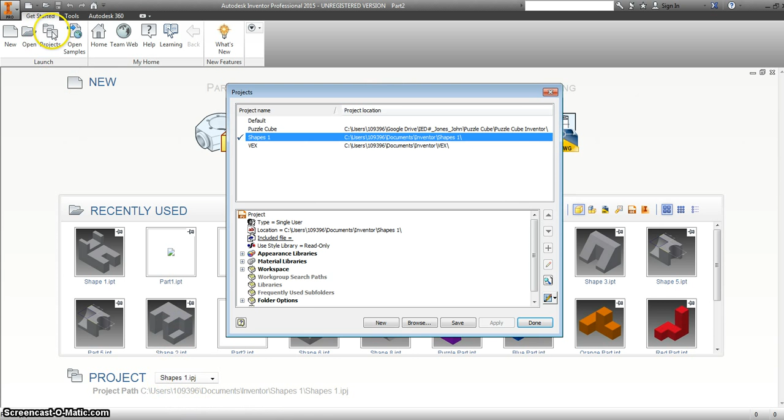Okay, if you do not have a shape project, remember, you're going to do Project, and then New. Next, you're going to name your project Shapes, and then you're going to change your path for your directory to go to your Google Drive, your folder, and then to the Shapes folder right here, and then you're going to hit OK. I can't do it because I've already done it, but you're going to hit OK and go on.

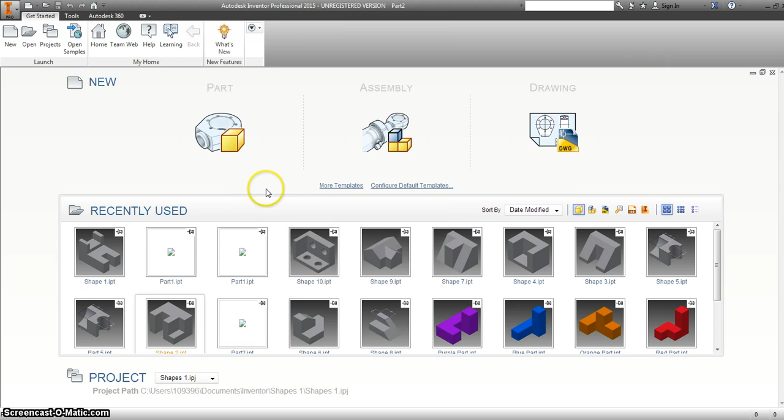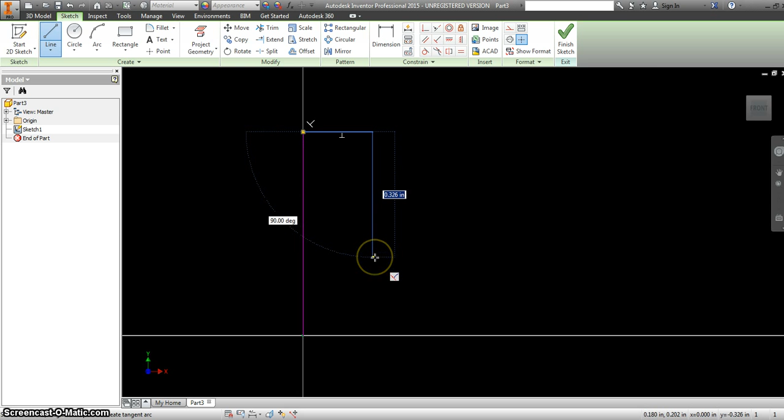So that means we're going to draw on our front plane. Okay, so to draw that L, we're going to use our line tool. We're going to start at the origin. I'm going to click, drag up. You see how it says that it's 90 degrees. Click and then drag across, keeping it perpendicular. Okay, this is still 90 degrees. Alright. Okay, so there I have my L shape.

I kind of drew mine a little weird, so I'm going to dimension it here. So from here, you're going to hit Dimension. And we know that the bottom of that shape, remember, you're going to click the line. You want your dimensioning to be as neat as possible, so you're going to pull it down, keeping that number in the center. And that is going to be 2.25. Okay, and then our height here, same thing, is going to be 1.5.

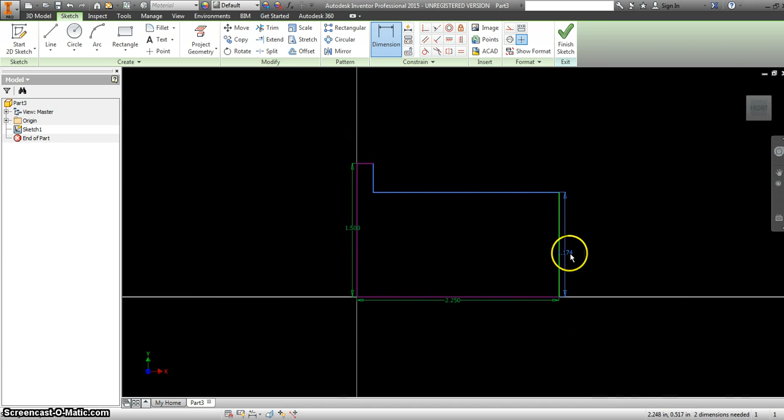Make it so I can see it. Alright, this height right here is going to be 0.75. And then this distance up here is going to be 0.75. Okay, so here is my L shape that's the front of that.

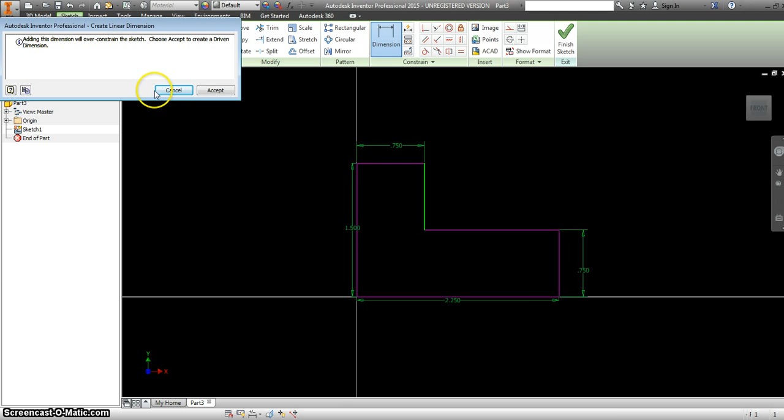And just so you notice, if I try to dimension this side, when I pull it, it tells me that it's 0.75, which it is. But if I try to add it, it's going to tell me that it's going to over-constrain the sketch, which means that it's unnecessary that I put it there. Because if I know this dimension here, and I know this dimension here, this dimension is just an understood. You don't have to write it down.

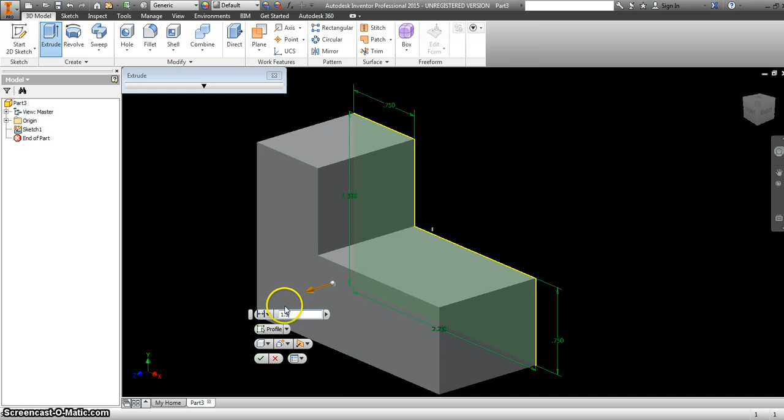Alright, so I'm going to finish my sketch. And then from here I'm going to go ahead and extrude it. So right-click, extrude, and it looks on the drawing that it extruded 1.5. So we're going to do 1.5. Okay, so if you notice, this right here is the basic shape of this drawing.

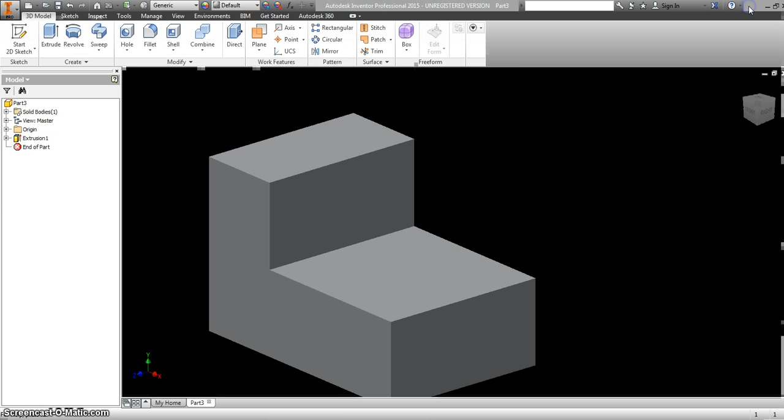All I'm missing is that I have to cut this part out and I have to cut this part out. Okay? So basically what I'm going to do is on this face, I'm going to cut out a rectangle, and then on this face up here, I'm going to cut out this rectangle. Alright, so we're going to do it on this face first, so we're going to right-click, hit New Sketch.

Okay, and we're going to draw a rectangle. We want to make sure that we're jumping to this line because we know that we need it to connect there. So we're just going to start it anywhere. So we're going to start it, see how it snaps to it, and it turns blue, so I'm going to click it, I'm going to drag it up, I'm just going to make a rectangle.

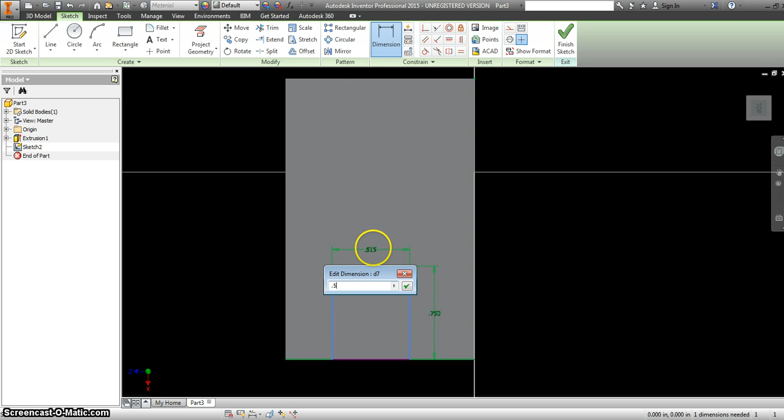Okay, then I'm going to go through and I'm going to dimension it. So I know that this height right here has got to be 0.75. Okay, and I know that this, from looking at my drawing, is 0.5. Okay, so now I've got my rectangle, which is dimensioned correctly, but I need to make sure that it's the correct distance from each of the sides.

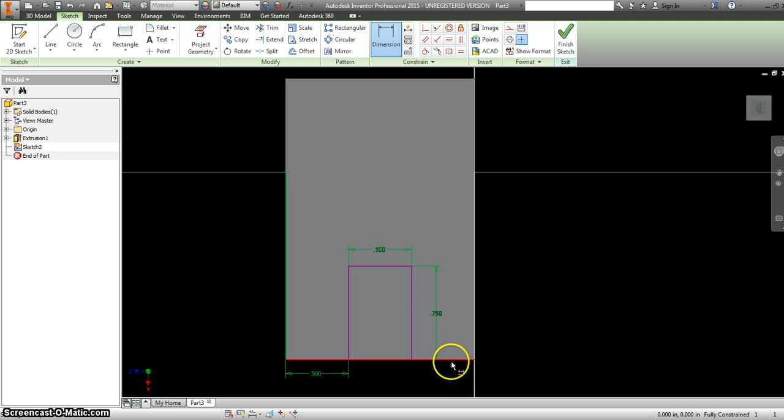Okay, so the way that you do that is you're still on dimensioning. You're basically going to say, what's the distance from this line? I'm going to push it, and then that line, I'm going to click my button, and then see how it pulls out. Right, and it's telling me that it's 0.486, but I want it to be 0.5. Okay, so now that that's 0.5, this also is going to be 0.5. So I'm going to hit Finish Sketch.

I'm going to come up to this face, I'm going to right click, hit Extrude, and I want to do this face, so I'm going to click that one. It goes up automatically, so I'm going to click right here on the arrow, and I'm going to pull it down all the way to the bottom, and then hit the check mark, and there we go, I've got that part done. Now I'm going to go and I'm going to draw a rectangle up on this part.

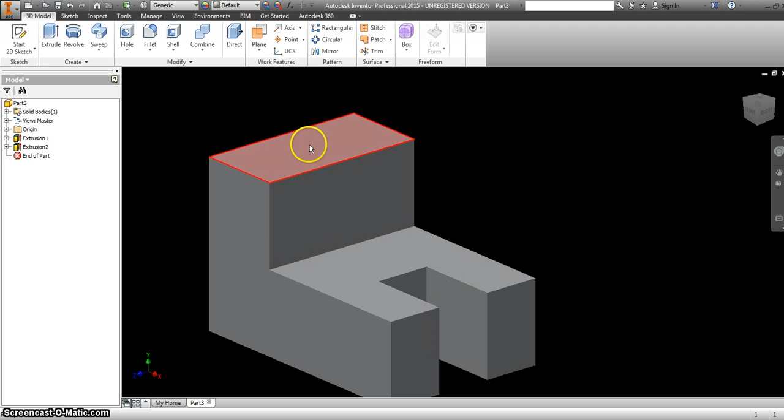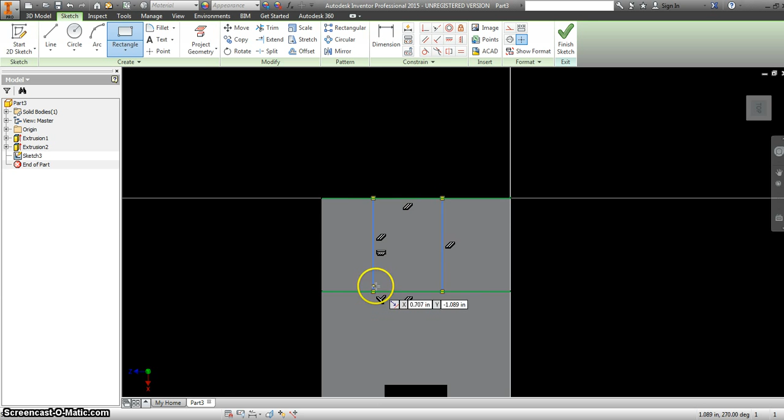So right click, New Sketch. Okay, same thing, rectangle. We want it to snap to this one. Okay, so see it turn blue, so I'm going to click, I'm going to drag. Okay, and you see how that other edge popped up? So I'm going to go until I hit that edge. Okay, it turned blue also, and I'm going to click. Okay, so my rectangle, as far as my links here, these should be already set, but I want to go ahead and dimension this part.

I want this distance, so I'm going to do the distance from this line to this line is 1. Okay, now I want to know the distance from this line to this line. So it's got to be 0.25. Okay, so see how that moved that over? Now this is also going to be 0.25 if I check it. Let's check it. Right? It's going to tell me not to do it, but I was just checking it. Alright, so now we're going to Finish Sketch.

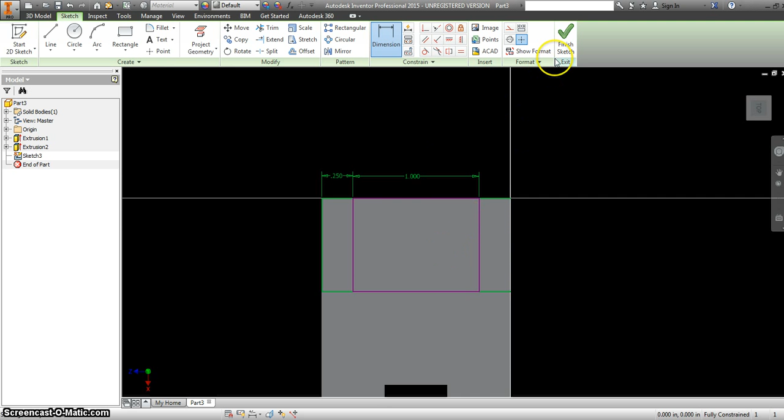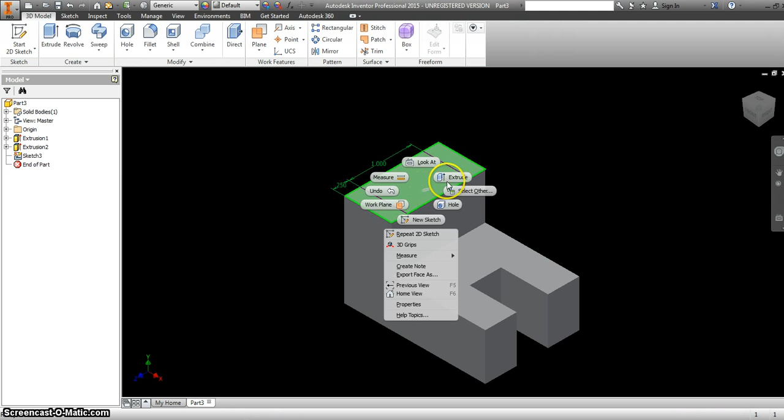Right click, Extrude. We're going to extrude this. And I can't see it, so I'm going to go to the Home. And I'm going to pull it down. Oops. Sorry, sometimes if you do that wrong, it does the angle. I'm going to undo. Right click. Sorry, Finish. Then Extrude. Alright, and we're going to go down. Okay, now once it goes past where it starts going down, then you can go ahead and change this. And it's going to come down 0.5. Alright, so here is my finished shape, shape number 1.